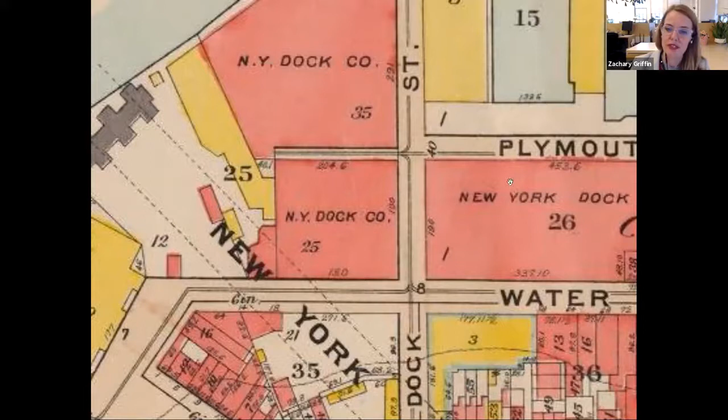It was really built as part of this whole complex where Empire Stores sits today, adjacent to it. And then, as we all know, in 1870 the Brooklyn Bridge started to be built, over the course of about 13 years. You can see the tobacco warehouse sitting at the foot of that.

In 1901, it changed from the Fulton stores. The Arbuckle brothers purchased the property, and it was transformed from a tobacco inspection into a coffee warehouse. It held coffee as a warehouse, but the building itself had that brick shell with a heavy timber structure within it.

And there were never any, it wasn't really an enclosed building. It had shutters that kind of closed it off, but it was really kind of an open air building.

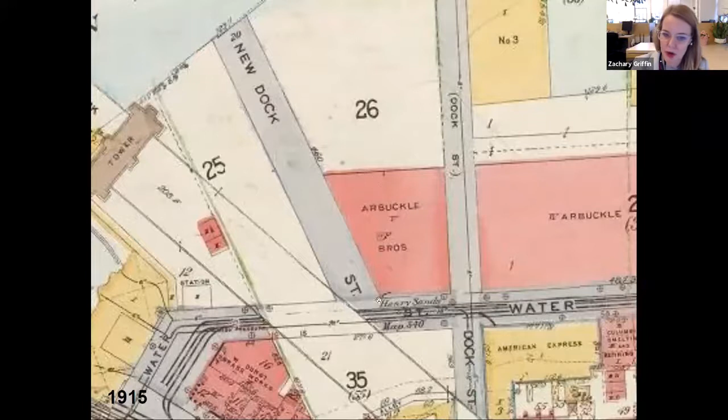In 1915, they came in and built New Dock Street, which ran adjacent to the Brooklyn Bridge. At that time, they chopped off a triangle of that building. So what used to be really 2 rectangles, with a party wall sitting right here, became a rectangle and a triangle.

And then we just wanted to show you what that looked like in 1925. It's still a 5-story building, but again with that kind of angled wall creating that triangle.

And then again, in 1946, the building was taken down from the 5 stories down to 2 stories. It wasn't until 1974 that the Fulton Ferry Historic District became part of the National Registry. Then in 1978, the building was acquired by the New York Office of Parks and Recreation and really began to deteriorate over the years.

The wood structure began to fall apart. The brick was really in disrepair. And then in the late 1990s, lightning struck the building, and there was a fire. That was the point where they really took the wood structure out.

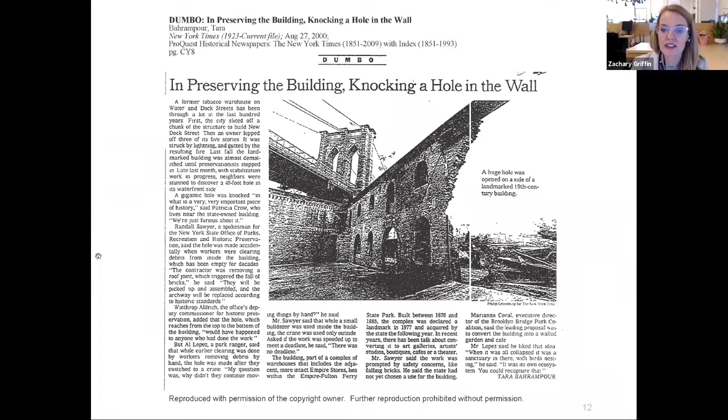At some point it was in such disrepair that they almost tore the building down, but preservationists really fought to save it. Then in the early 2000s, Robert Silman's office was hired to stabilize the structure and bring it back to life.

Over the course of a little over a decade, that's how the building sat as this historic relic, really a shell that was part of the park, open to the public. You could really go in and walk through it. On Saturdays, Smorgasburg filled the structure, and it really became this kind of community asset.

They held weddings there, and even St. Ann's had some performances within the tobacco warehouse.

So another big piece of the project is really St. Ann's history itself, and it played a really big role in our design and how we thought about the building and how it should be planned and laid out.

St. Ann's Warehouse really started its roots in the St. Ann's Church in Brooklyn Heights. Susan Feldman was hired, or really started a nonprofit, to develop performing arts programming.

And then she convinced the Walentas family to allow her to use a warehouse down in Dumbo, 38 Water Street. It was really there that St. Ann's Warehouse was developed. They were there for a number of years. You can see the tobacco warehouse is just diagonally across the street.

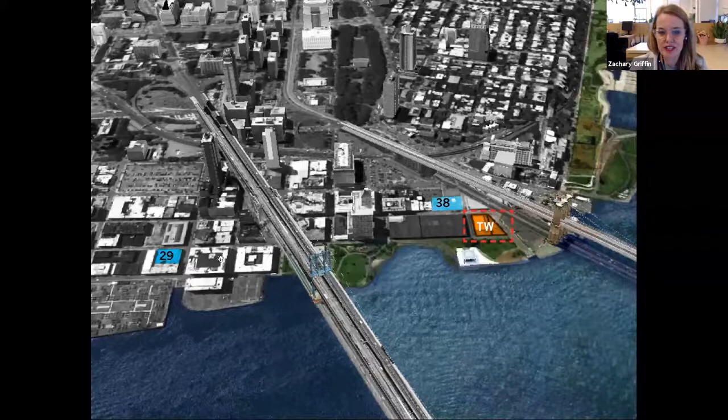That building was taken down for a new development, so for a temporary period of time, while we were designing and building the tobacco warehouse, they were located at 29 Jay Street for about 3 years. But this is the building they were in for well over a decade, and it really became kind of the DNA of St. Ann's Warehouse.

Again, really close proximity to where their home is now. But the warehouse itself really lent to establishing their reputation of having flexible performance spaces.

Every time you went into St. Ann's, you would experience something totally different. The place would be reconfigured in a completely different way than it was the last time you were there. That was really important to our design, that we'd be able to provide a space that could provide that flexibility.

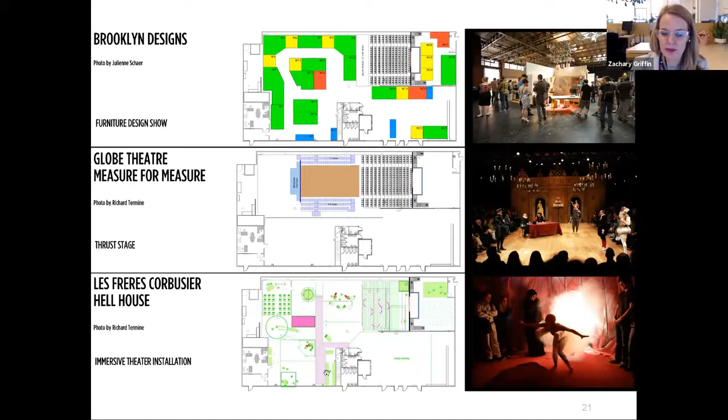So you can see some of the different performances that happened in that 38 Water Street space. They had Brooklyn Designs, the furniture design show there. They had a number of different configurations, including a more immersive performance.

And Black Watch was a show that we really wanted to make sure we could accommodate a traverse, something really long.

That was something we kept going back to. Well, can it fit Black Watch?

So we're going to step you through a little bit of the design process, and then Zach's going to talk more about some of the details of the project.

During that time, we began talking to Susan, and we were really happy to be brought on board to design and work on the project. It was very much a collaborative effort with Charcoal Blue, Buro Happold and Silman, with Susan Feldman really leading the effort and dictating where we were going with the design.

It was really about how we could fit the main theater space and also the studio theater, which would become a community space where anyone in the community could come and rent that space through Brooklyn Bridge Park.

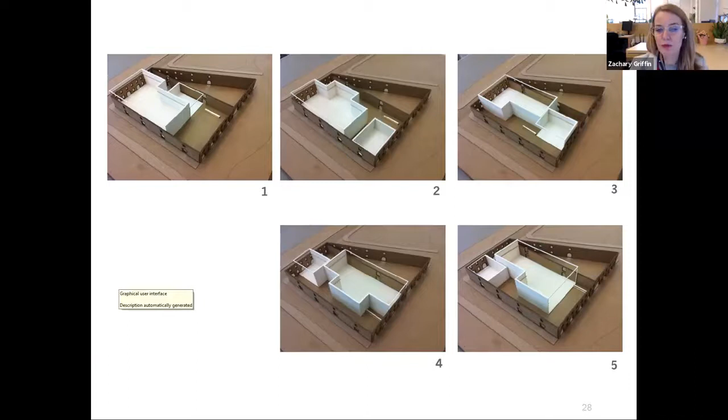What we came to very quickly was the idea of creating this volume that would house all of the program other than the main theater. So the dressing rooms, the restrooms, the St. Ann's office, mechanical, and even that community room would sit within what we ultimately started to call the bunker.

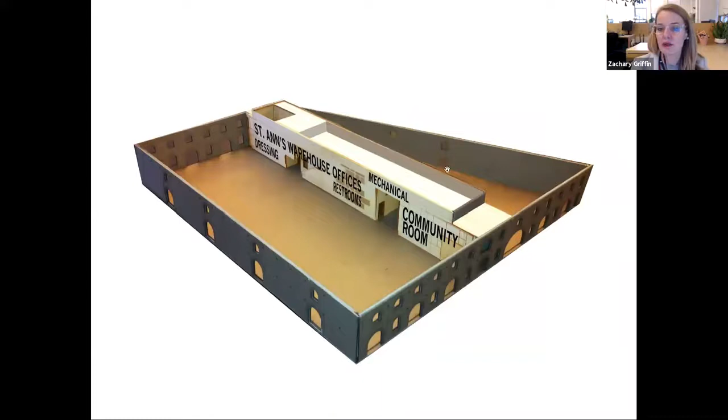That would sit between a rectangle and the triangle, allowing us to leave the triangle open and begin to create a warehouse and theater space for St. Ann's. Inside that, we would insert a steel structure that would hang a catwalk, which would run throughout that entire space and allow for ultimate flexibility for performance.

Ultimately creating that new warehouse for Susan and leaving the triangle open to the public, as part of the park.

Another important thing was thinking about how we wanted to enter the building, what was going to be the front door. The design embraced the idea of allowing the building to be very porous and allow you to come into the building in different ways.

Depending on how they set up the show, maybe they would direct people towards one door or the other. But we did want to have a connection directly from the triangle into the main space. We wanted the waterfront to feel very welcoming and open, but also many people come down Dock Street, so it made a lot of sense to have access down Dock Street.

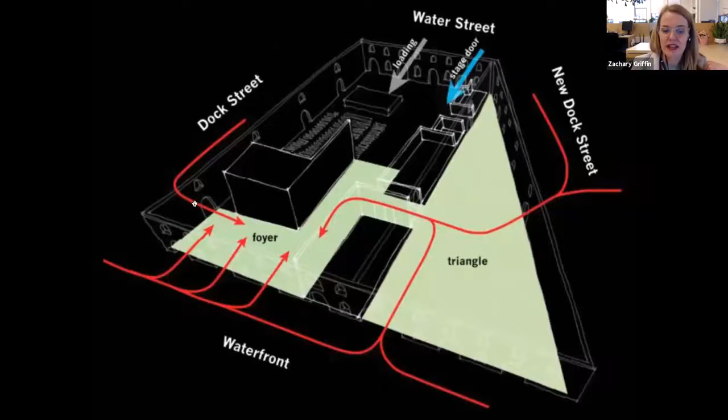Another important thing was that the community really wanted that visible connection through the building, which they had when it sat as a shell. They wanted to make sure there was an opportunity, when walking down Water Street, to see all the way through the structure and to the waterfront.

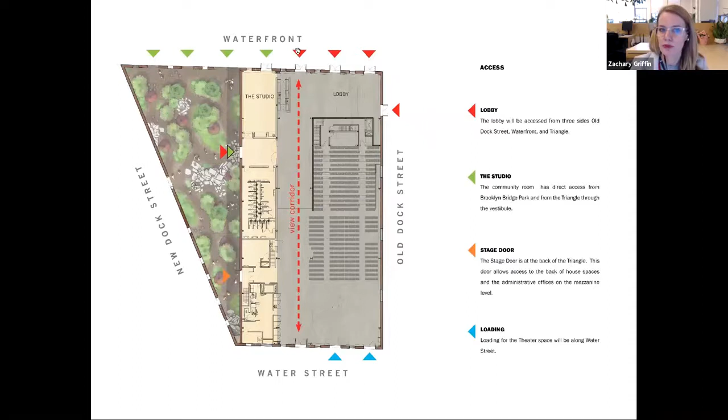With this configuration, we began to test how we could fit a large concert with 800 people, what was the standard configuration with 330 people, a standard end stage, and then a more linear configuration like that Black Watch performance.

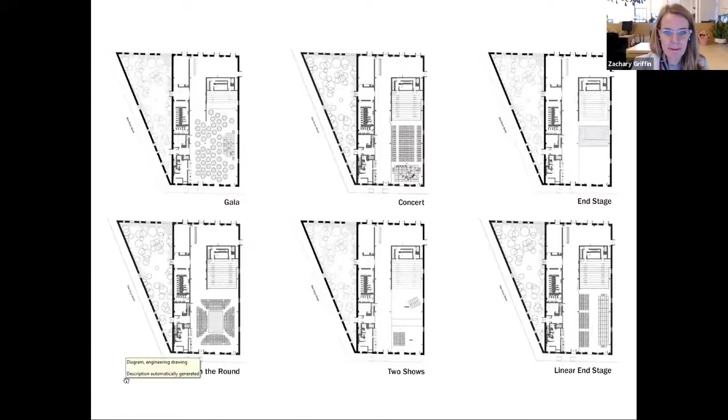This is a section showing how the building started to lay out, where we would have all of the program within that bunker space, the main theater as that main volume, the catwalk taking up as little space as we could, and then mechanical and structure on top of that.

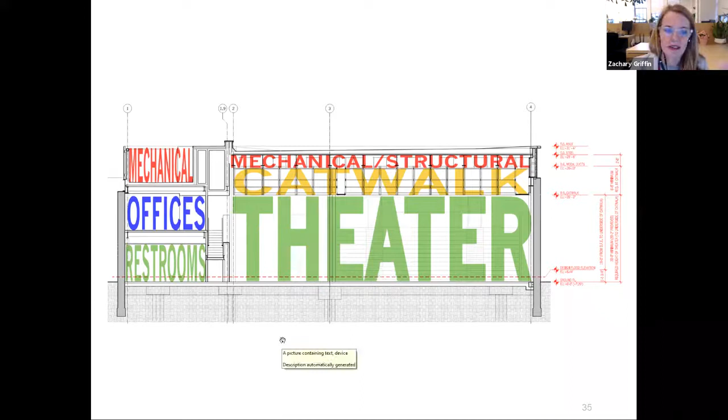That really led us to the existing brick wall - we had about 7.5 feet that we needed to rise above it. We started to look at the proportion of that and what it would become. These are some very early massing studies from October 17th, 2012, where we were looking at how much that wall was sitting above the existing brick wall.

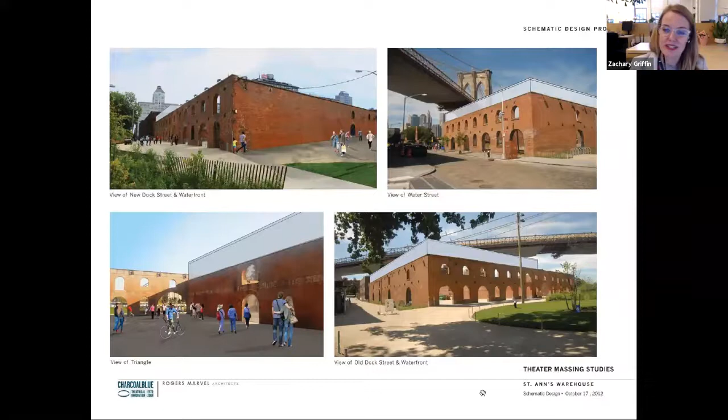But just a few days after that October 17th presentation, Superstorm Sandy hit. This is an image where the tobacco warehouse is sitting right there, and a tremendous amount of water came into our beautiful structure, which made us think about the project in a little bit of a different way.

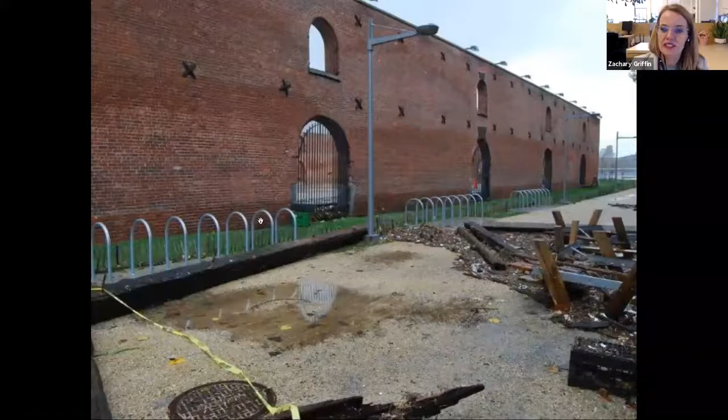So you can see that this is an image of the building just after Sandy. That's the water line of where the water was inside the building.

Zach's going to talk through some of the decisions that we made as we worked through that. Thanks, Lissa. Yeah, as you can see, without changing the overall design concepts, it was very much a rethinking of how we are thinking about the building in terms of resiliency.

Lissa had mentioned that St. Ann's Warehouse needs a certain playing height for the types of performances they put on, and that's about 20 feet. So that's the space that we are providing below the catwalk area.

After Sandy, as many of you are aware, there are new design flood elevations that we were having to contend with. Not wanting to raise the building height up more than we had to, paying respect to the height that St. Ann's needed for their performances, we realized we had an issue that we needed to take a look at.

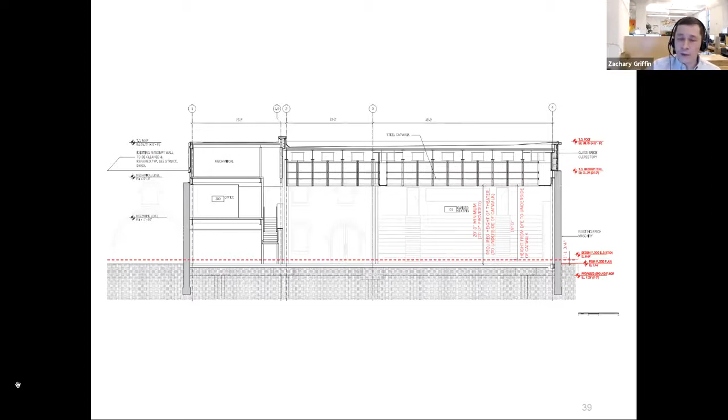So we started thinking of ways we could either design to the design flood elevation or propose a different way of doing it. We explored a lot of different ways of trying to comply with it, and none of them really worked. Floodgates and dry flood proofing would be a challenge because the weak point would become your masonry walls where water would end up seeping in anyway.

So we ended up proposing to build the ground floor below the design flood elevation and going through BSA to do so. To do that, we proposed a series of resiliency measures.

The major one was locating all of the mechanical and theatrical systems above the ground floor. So the only thing happening at the ground floor would be incoming services, routing everything up to equipment located on upper levels and then feeding down.

Ideally, in a performance space, originally we had been thinking about providing conditioned air from below because of acoustics. Sandy obviously made us think that that was probably a bad idea.

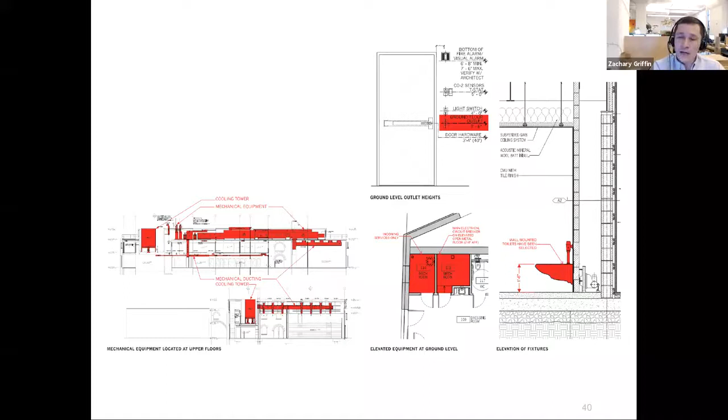We also looked at different construction methods. On the ground floor, we used masonry walls for the lowest portion of the partitions. That way we could allow water in during future events, and the only thing sacrificed would be the wall finishes themselves.

You can see that construction here on the bottom right. It also informed our decisions on interior finishes, choosing things that weren't precious but also played into the aesthetics of St. Ann's, while being easily replaceable if a future event were to occur.

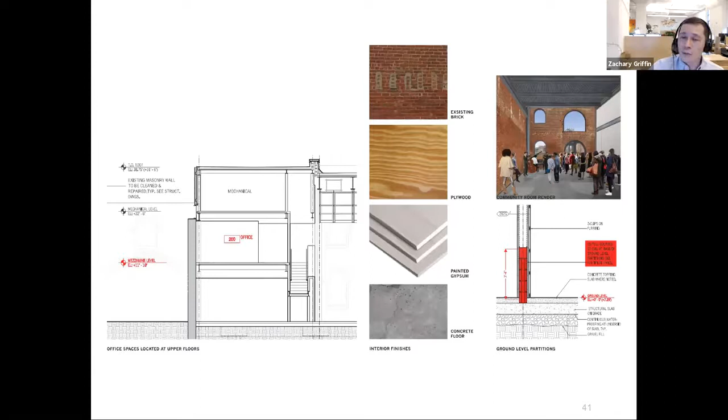We were still dealing with the issue Lissa mentioned earlier of how to accommodate that change in elevation above the existing height of the walls and the clerestory height needed to accommodate the catwalks. So we explored many options - this is a select handful of many more that aren't on the screen right now.

We were trying to find the right material that would both complement the existing masonry but also demarcate the new construction versus the old construction. So we looked at a lot of glazing options, a lot of more solid opaque options, but it was difficult to find something that really blended the two and had them be complementary.

The bottom left image was trying to use a metal screen that used the same geometry as the brick ties of the existing walls. That was a leading contender for a little while.

We finally came along to a glass brick product, and that really ended up being the favorite. It was an organic texture that spoke to the existing brick, but it was also a clear way of noting the existing versus the new in a way that lets you experience and see the existing walls as you would normally. You can see that the glass brick reflects some of the sky, so that the new construction is clear in what it is, but it lets you see the existing masonry walls for what they are.

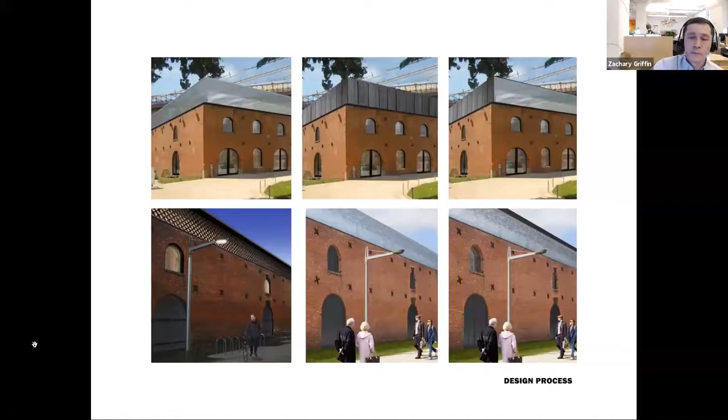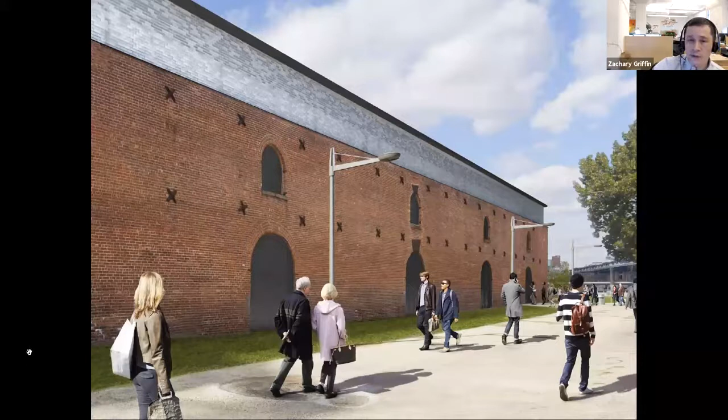So this is a view from Old Dock Street looking down, and you can see that glass brick clerestory slightly inset from the existing masonry walls.

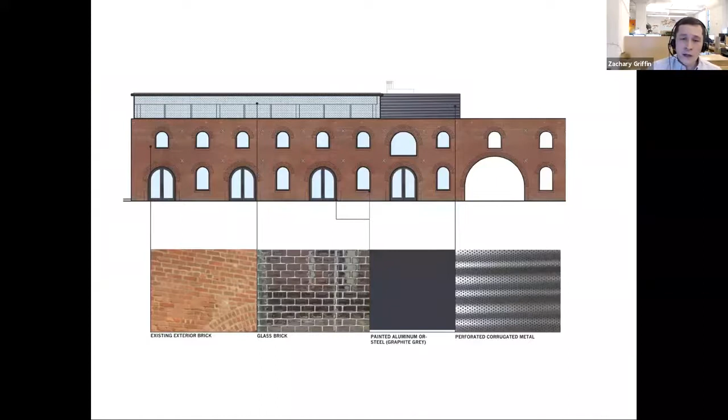So we developed this detail for the glass brick with Pittsburgh Corning, who makes this product, and it ended up being a kind of perfect fit for the building because it's a solid glass brick. It's not like a hollow glass block, and in that way it's very good for acoustics, which is great for the theater. It also allows daylighting into the space, and in a theater atmosphere, that's a rare commodity for the folks working in the theater on a daily basis.

This is the glass brick detail. Interestingly, our entire new building sits within the existing brick walls, but does not bear on them. Talking to Silman, who knows this building intimately, they made us aware that the existing brick walls are sustaining themselves, but they wouldn't be able to bear any additional weight of the new building. So essentially, we built a new steel structure within the shell of the existing brick masonry. The glass brick is cantilevered off of that steel structure and hovers over the brick wall.

And really the only seal that's made between those two is an acoustic expansion joint product that makes the seal between the new and the old.

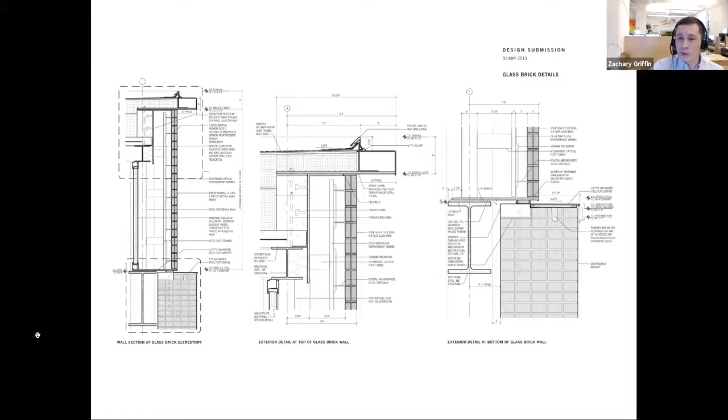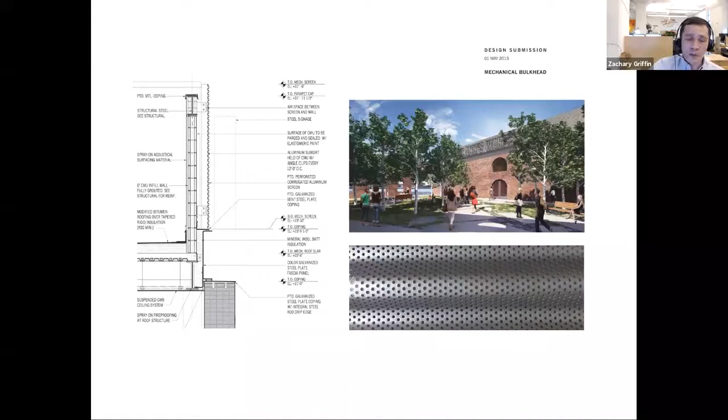On the triangle side, we had a similar condition. The demising wall between the two portions of the older building is somewhat lower. Here we devised a similar thing where, again, it's not resting on the masonry walls, it's hovering over that. And we created an acoustic wall that's shielding the mechanical equipment behind it in this case.

The glass brick details were a unique detail, and it was something new that Pittsburgh Corning had not really done before in a prior project. So we worked with them to develop unique custom details. I think in the past, this product was used on transit, correctional facilities, and educational projects, and typically it was done in a stacked bond configuration. So we had to work with them to develop how we could use it in a running bond that would be more like you would see in a masonry brick.

So with that material selection made, these are a series of design renderings once we had solidified our material palette.

Another thing to note is the exterior doors and the exterior windows. We had designed those carefully to match the historic shutters that were once within those openings. So the strapping on the doors, the astragal detail was meant to be a replication in dimension and color to those previous shutters.

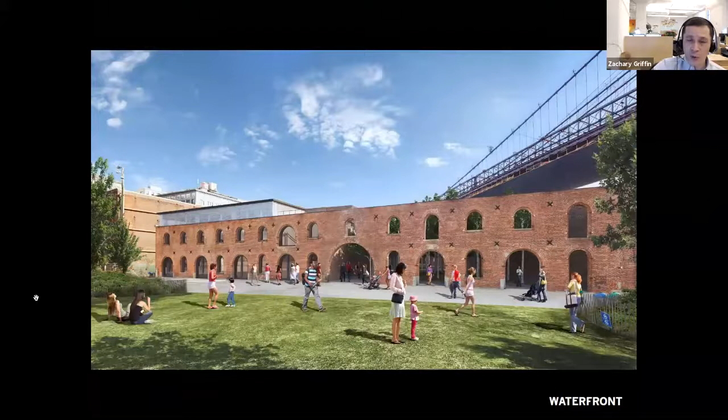On the inside, we also wanted to develop a material palette that was both reverential to the existing brick masonry walls, but also evocative of the spirit of St. Ann's Warehouse. And so we worked a lot with our mechanical engineer, Buro Happold, to develop details that allowed us to condition the space without furring off of the interior of the existing walls or insulating them. That way we could leave the existing masonry walls exposed as one of the interior finishes.

And so what's not shown in this rendering is along the perimeter wall, we have a fin tube radiant system that conditions that wall in just an efficient enough way to let us not have insulation and furring off of the brick on the inside.

The rest of the interior material palette really consists of two additional materials, which is blackened steel and plywood cladding. So these are both designed to be resilient and replaceable, but also durable for use in a flexible theater setting.

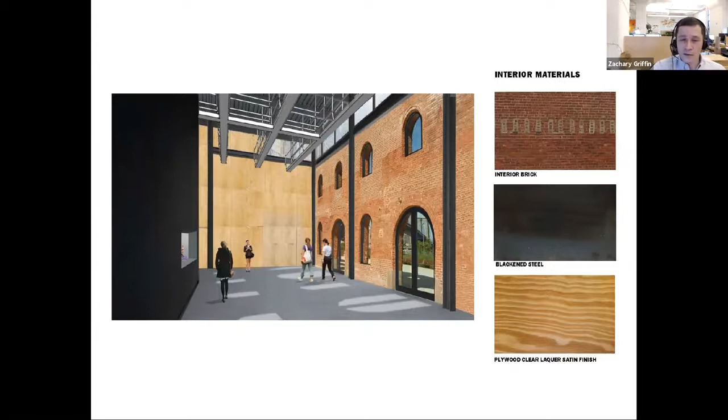So this is the bunker that was clad in the plywood. This is the community space and studio theater. So two sides are the existing brick, and you have framed views of the park and the Brooklyn Bridge beyond.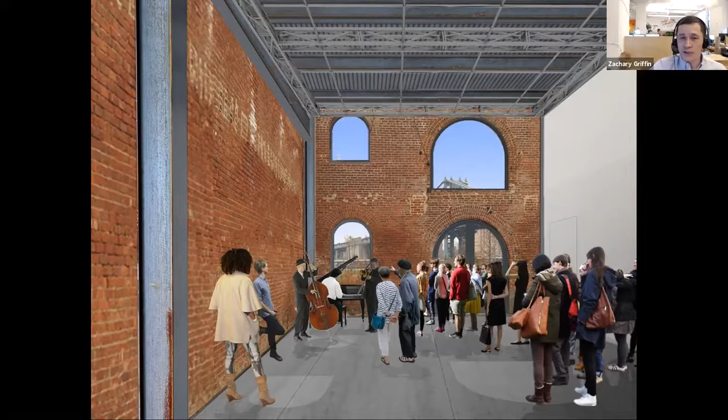Another part of the interior aesthetic was very much to leave the new steel structure raw, not paint it. We were not obliged to fireproof the steel, which we're happy about. But we also made intentional decisions not to take off the chalk marks from the steel fabrication. In that way, it was relating the new structure to the existing. The existing brick has instances where there's paint marks left from its use as a warehouse, and we thought that treating the steel as a raw material was a way of speaking to that.

This is that view quarter that Lissa mentioned. So in this rendering, we would be looking from Water Street through to Brooklyn Bridge Park. And you have that clear view through.

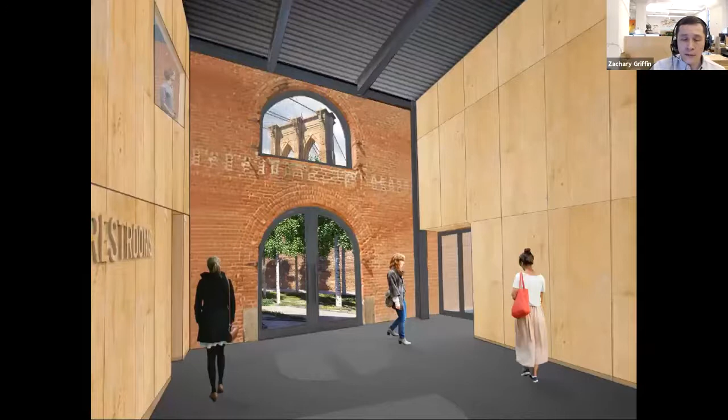Another element in laying out the space was to take advantage and not lose some of those kind of magical moments that were in the shell of the existing walls. This window framed the top of the Brooklyn Bridge almost perfectly. So we were able to lay out the space such that this area became a double height vestibule entry from the garden itself. This is one of the main entries into the space, and when you're leaving into the triangle garden, you get this nice framed view of the bridge.

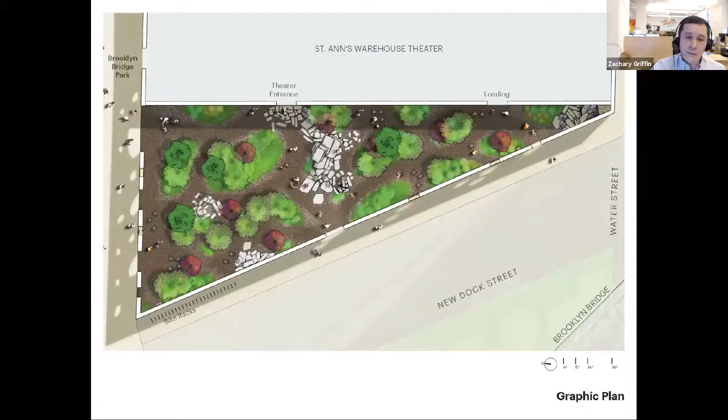We also worked very closely with Michael Van Valkenburgh's office to design the triangle garden. MVVA also designed Brooklyn Bridge Park, so it was a perfect fit to have them come in and do the triangle garden. I think it ended up being a seamless connection between the greater park itself and the triangle garden, but at the same time, the triangle garden is this nice quiet respite within the park, its own unique moment.

This is a nice instance where this is open to the public. It's part of the park, but it's very much also part of St. Ann's entrance.

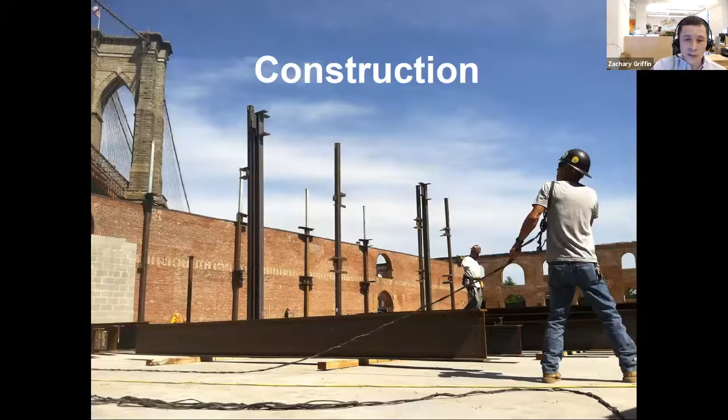So with the design in hand, we moved into construction. We thought, because this is an existing masonry shell only, an adaptive reuse involving exterior walls only, existing conditions issues might be minimized on this project. But they ended up not being minimized. So immediately upon starting construction, some of the things that Lissa and I had been apprehensive about came to fruition.

During design, we were working from two-dimensional surveys in plan and elevation of the existing walls. We had hesitation with that because we knew those walls were not braced at the top for many years, so there's a lot of bowing and bending happening within the walls that we were afraid wasn't being captured in two-dimensional surveys.

When construction started and the steel erector came on to do their surveys, they were noticing that, yes, in fact, some of the column locations with our new steel column grid were hitting instances where the masonry walls were bending quite radically inward and outward as the wall moved up vertically.

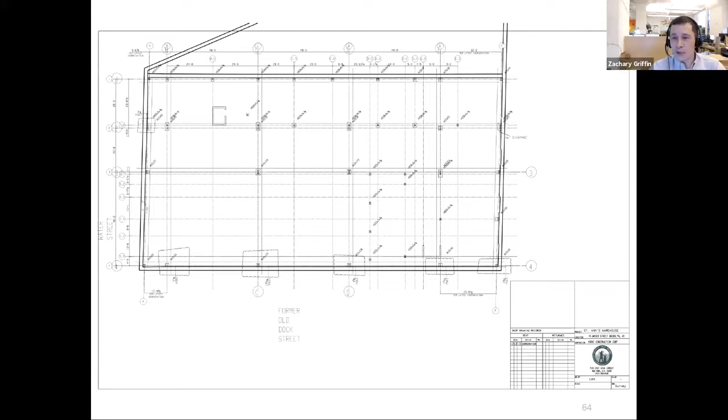Luckily, our CM commissioned a three-dimensional point cloud survey immediately after making that realization, and we had a very detailed three-dimensional survey at that point of every part of the wall. With that in hand, we were able to slightly readjust our structural grid and recommence with construction.

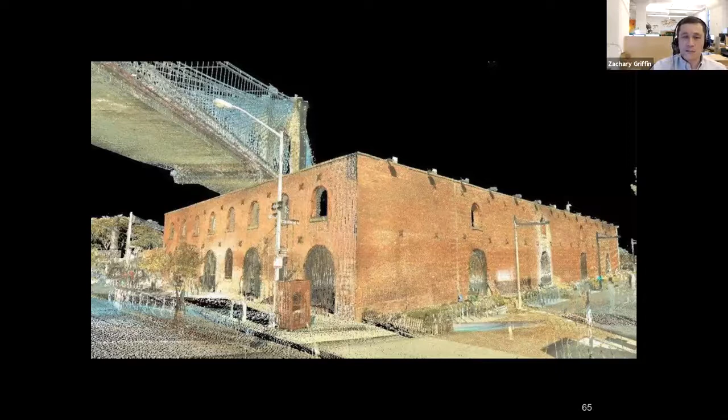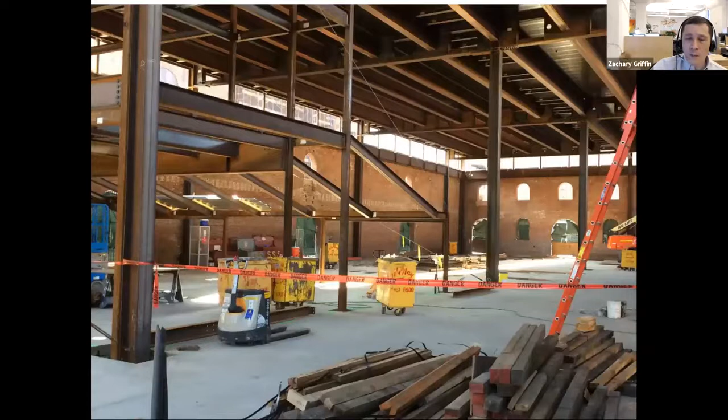In this picture, we can see the steel still going up, but you get a sense of how the clerestory is coming together here. And you can see the beginning of the permanent portion of the seating rake being formed right here.

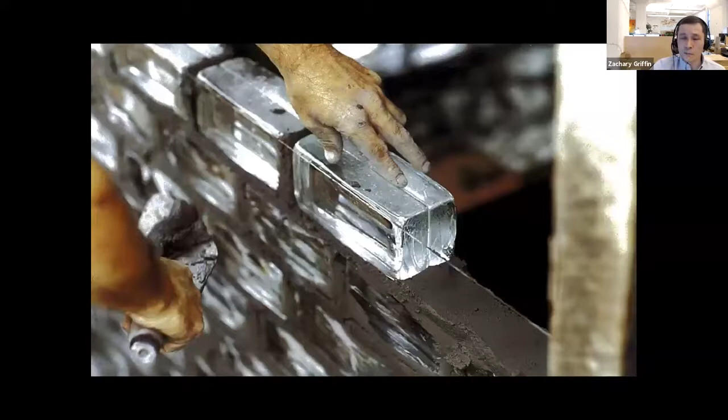So this is with the glass brick fully installed, and we can see some of that raw steel with the markings that we kept as a finished condition.

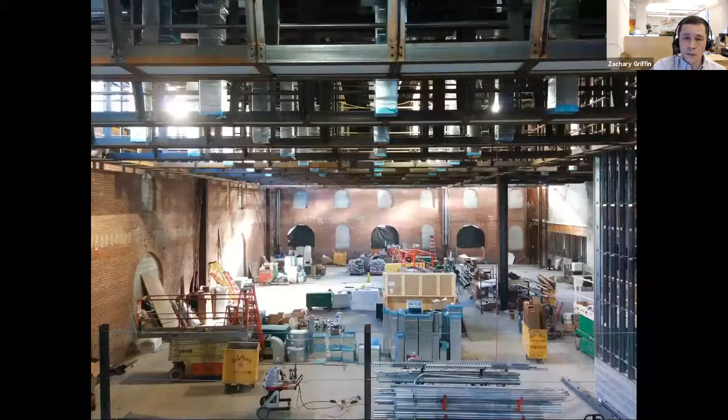This image is with more of the catwalk done, and you really get a sense of that field of catwalk creating the plane of the ceiling within the space, but also how it allows for any type of configuration to happen below because you have so many fixing points. You can also see these silver elements are mechanical ducts, from locating the equipment above and then feeding air down through the space.

And with that, I'll hand it back to Lissa, who will talk a little bit about some completion images of the project. Great, thanks, Zach. Yeah, we wanted to just kind of take you on a tour a little bit of the finished space and try and point out some things as we go.